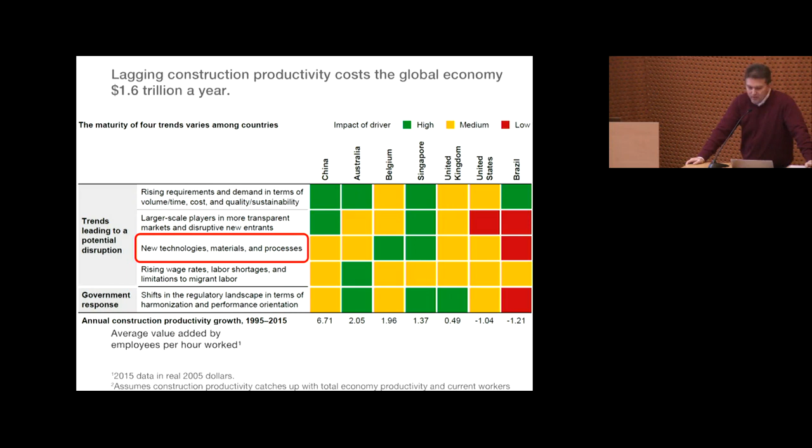Of the four key trends that can disrupt this phenomenon, only one is technical: new technologies, digital technologies, new materials, and advanced automation. The problem is how can we exploit these digital and automation technologies without first digitizing our processes and hence our products?

If you look at how we are doing in terms of digitization within the construction sector, we are almost the worst. Only agriculture and hunting is below us. And this is before we actually are at the very bottom of all industries in terms of data stored.

We basically lack the efficient means to cost-effectively generate and exploit what we call digital twins of our assets, which is why only less than 2% of the existing building stock even has a basic design information model of any sort, and even less for horizontal infrastructure. This is the problem that my group at Cambridge is focusing on.

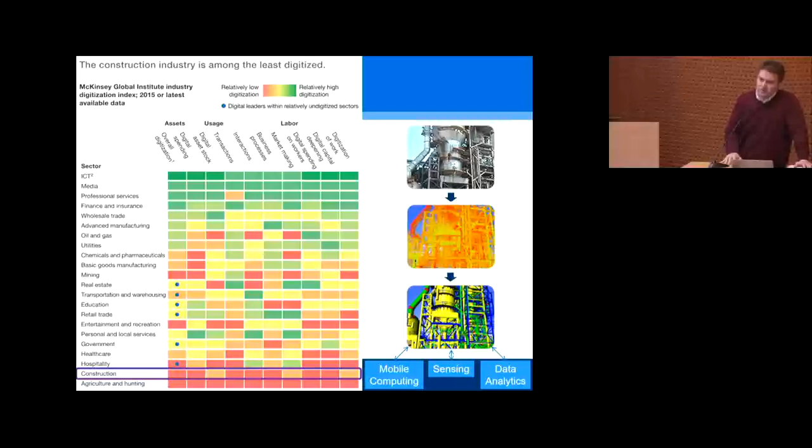But before I tell you how we solve it, I want to tell you first what the outcome looks like. Define the digital twin. For manufacturing, this is not a new expression, it's been around for a while. For civil engineering, it is a rather new expression.

Yes, it is a model, a digital copy of a real thing. But what makes it different than all the other models is two aspects. One is replication: it has to accurately replicate the real world, both in terms of geometry and other aspects. The second is connectivity: it has to be connected ideally to the real asset so that we can see, hear, and feel exactly what the asset is experiencing.

So, in a nutshell, what we try to do is create geometric digital twins of buildings and infrastructure, enrich them with structured and unstructured data, and then exploit them to improve design, construction, and operation processes.

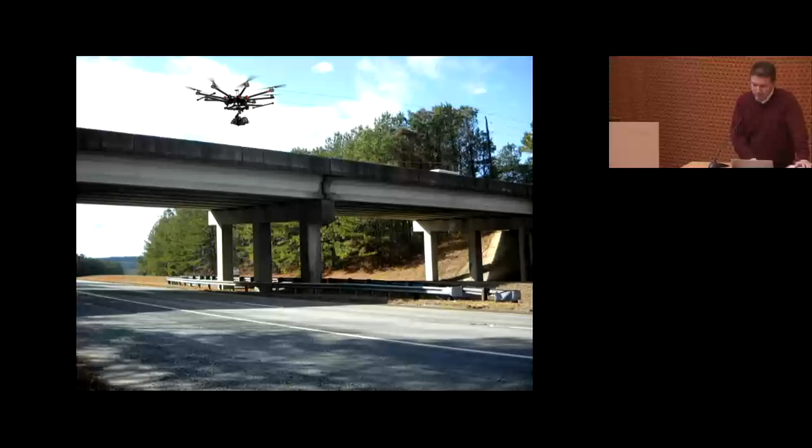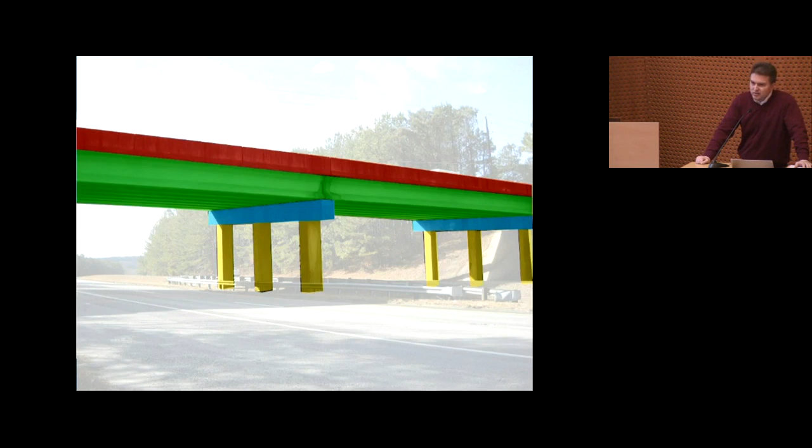So the example you see here, I want to automatically somehow scan this bridge in some way, get the points and the pixels. From these, convert them into actual objects of an information model, and then add the real textures on top, detect and measure, for example, any visible condition data, and assign these things as properties to the object, ideally with little or no human input.

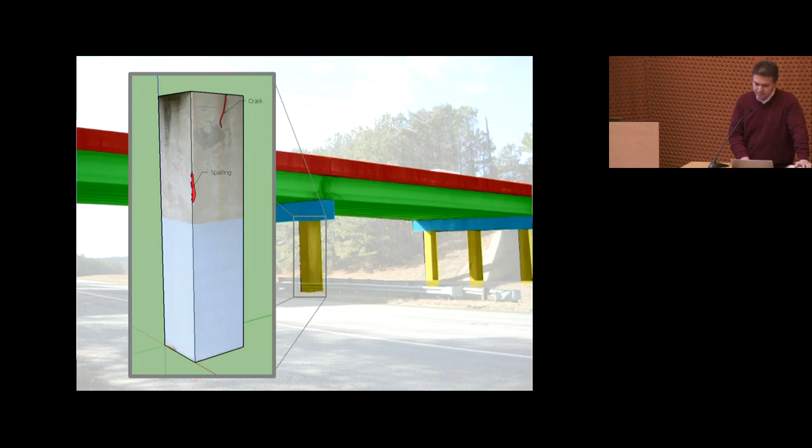And of course, I then want to exploit this outcome. So here's how we do that. I'll start first with some work we've done quite a lot of years back.

This is work we finished in 2012 on what we call mid-range mobile videogrammetry. Back then we were trying to scan buildings with laser scanners, and it would take us quite a lot of time to finish scanning sessions, given the time it takes to produce each scan and the fact that you have to scan separately in every single room if you want to produce a complete model.

At the same time, I was exposed to several medical tools that allow you to scan a human body interactively, which was pretty cool. The problem is that we couldn't use those tools for civil infrastructure because we had long scanning distances. I had to be able to do that scan from, let's say, 25 meters away.

So what we did at the time is we came up with a modification to the hybrid bundle adjustment, to the bundle adjustment process used in photogrammetry, to add on top of it not just point features optimization, but also lines and plane features, which are actually very, very strong in infrastructure.

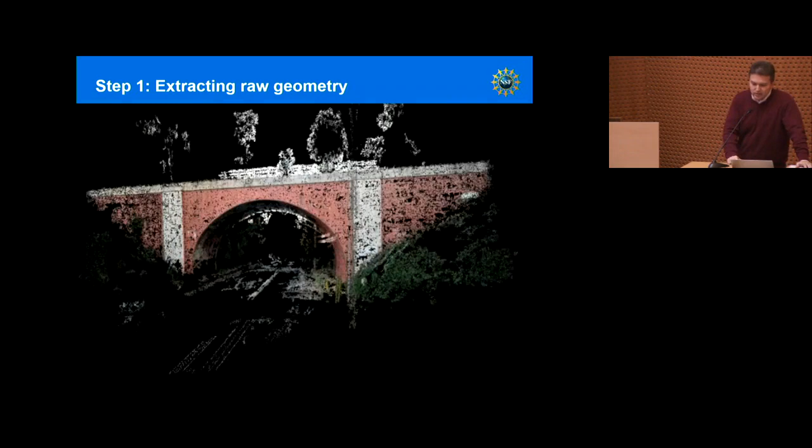The consequence of that is we were able to come up with a solution that allows you to take your phone out, videotape a building from 25 meters away, and from that create a point cloud with a sub-centimeter spatial error. Now that's all great, and then you can use additional techniques to fill the gaps, equalize the densities, fix the holes, and so on.

But for us, that's still just a point cloud. It's the beginning of a journey rather than the end. Engineers, at least our kinds of engineers, don't like to play with points. They like to play with models.

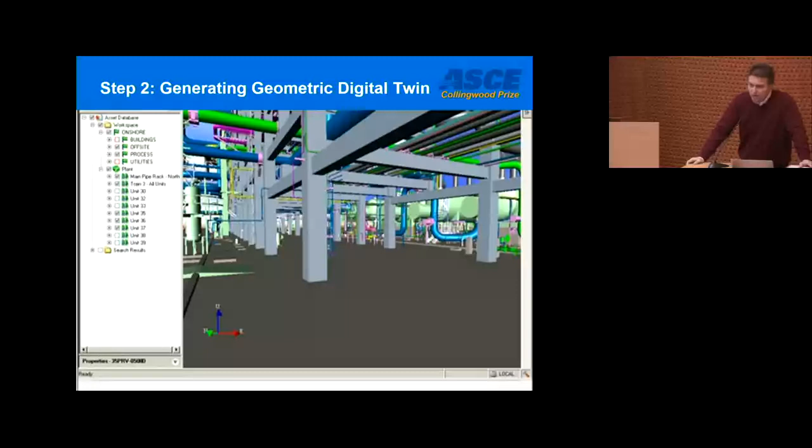And so our next challenge was, how do I go from a data set like a point cloud, which is primarily meant for the computer's eyes to see rather than a human's eyes, into something that engineers are more easily familiar with, like the models you see here. That's actually a much bigger challenge, and it's a much bigger challenge for a couple of reasons.

First of all, we're talking about a massive labor task to create the models. For example, for every 1 day of laser scanning, many sources report you need to spend 10 days modeling. The example you see here, a reactor building with 40 billion points, took 10 people 6 months to make the model. This is from EDF's research.

The other problem is that we're looking at massive point clouds that we cannot open with a single computer in many cases, with well above 30 billion points. In large industrial facilities, we easily exceed 100 billion points. We can only open them piecewise, try to model, and then try to stitch the results together at this point.

But the worst problem of all is what I call modeler fatigue. It's a boring job. Can you imagine someone modeling pipe after pipe, valve after valve? We're talking about tens of thousands of objects, in some cases hundreds of thousands. This is clearly a type of problem that screams for automation.

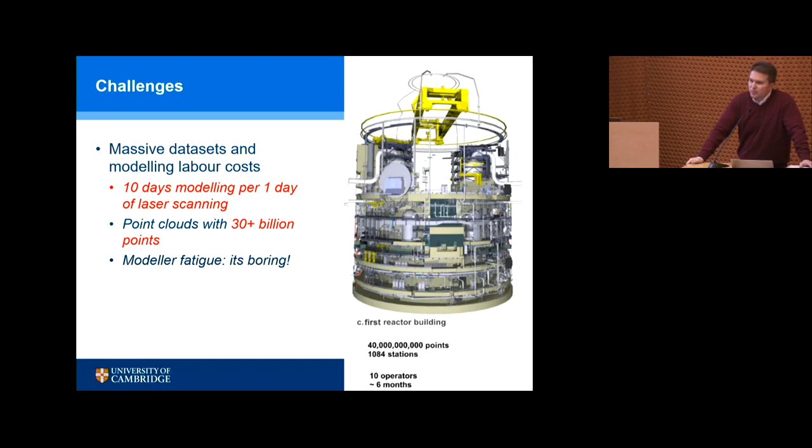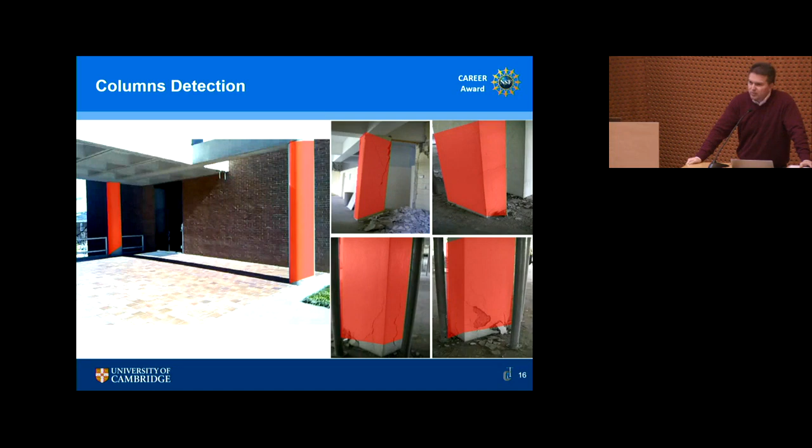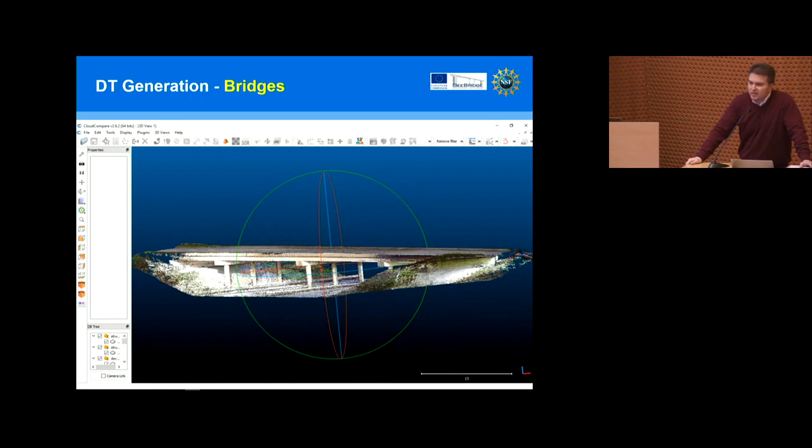Zoom in 10 years later, now we have the ability, for example in the case of bridges, to scan a bridge and then from that scan automatically create the components, and then use them for various purposes. What I think is very important to mention is that we can do this with real data, not synthesized, idealized data.

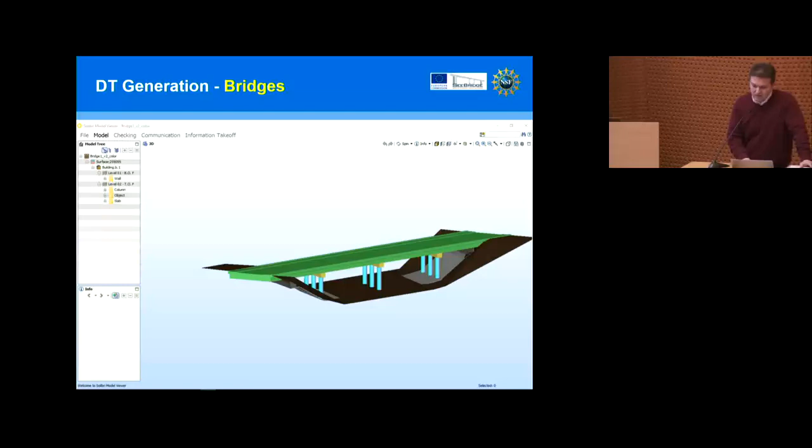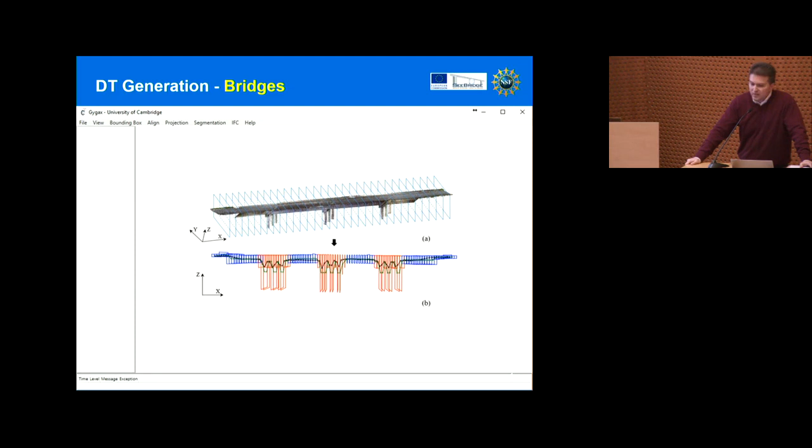No bridge is straight. No bridge component is straight. In the real world, we have to deal with all sorts of peculiarities and skews. Our ability in this case to use recursive slicing techniques and others allows us to cover these complexities and produce reliable models at the end of the process.

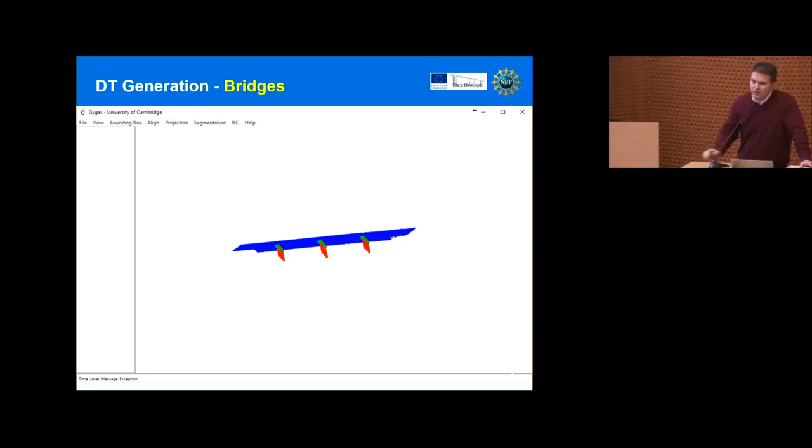In a nutshell, we can go from this to the point clusters to the model without a human interfering in the process.

Same thing for buildings. There was another project we did several years back, funded by the European Commission together with Stanford, Georgia Tech, and other universities, to do what we call formalizing the digital twin generation process, or in more colloquial terms, how do I go from a video file to an information model.

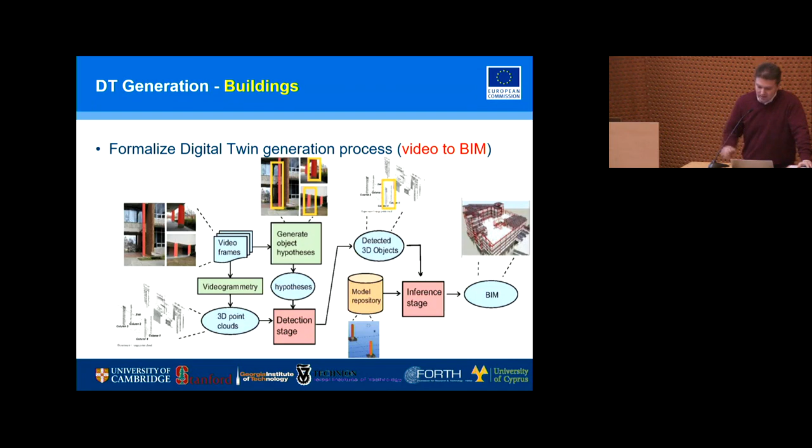In this case, we looked at similar techniques as we had used for bridges, basically a top-down hierarchical segmentation process. Only here it was a bit more difficult because in bridges everything is exposed, whereas in buildings we try to hide everything.

In many cases we only see part of the object, and it's very difficult to understand what it is just from what we're looking at. So in those cases we have to infer what might be in the back.

Just to explain with a bit more detail what kind of strategies we're looking at: in the case of a building, I'm trying to use architectural priors, knowing how a building typically looks, to try to hierarchically segment it. For example, I know a building has floors, so my first job is to segment the floors.

Once I have the floors, then I know that every floor is composed of rooms. And what is a room in a point cloud? It's a big empty blob, right? I want to find those big empty blobs and understand the spatial topology and where the rooms are.

Once I know I'm in a room, I can safely assume that most likely there is a ceiling above me, most likely there is a floor below me, most likely there are walls around me, and so on. I think you get the point. It's a hierarchical process that uses these types of architectural priors to help you understand your environment.

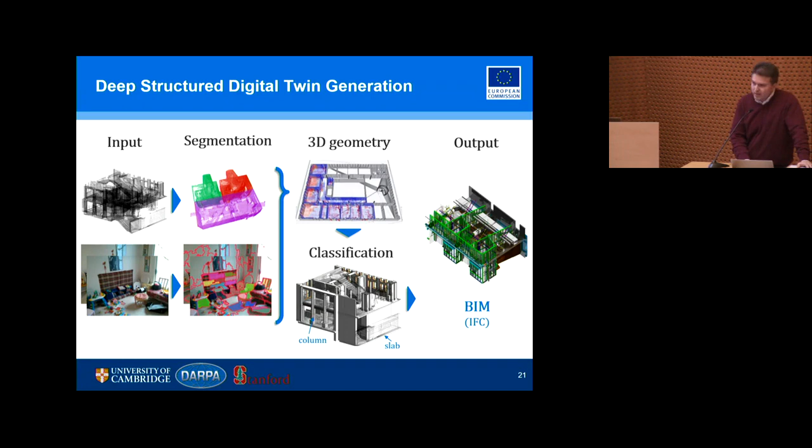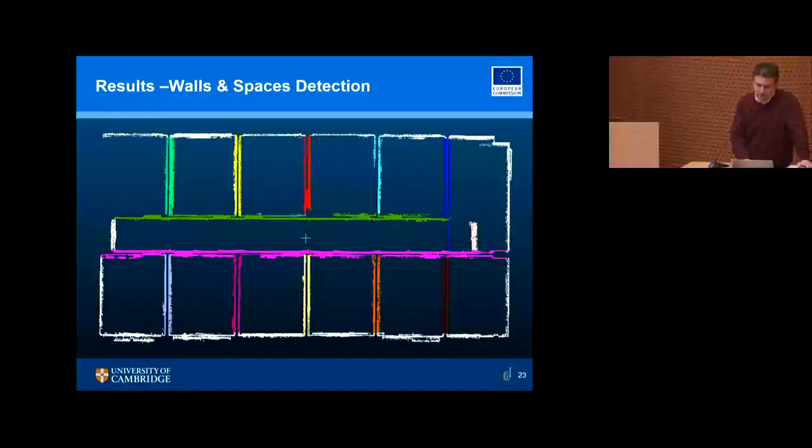This is exactly what you see here: how we use various deep learning tools to go from the big point cloud down to rooms, then from rooms to detecting slabs, even in the presence of clutter, then going from that into detecting walls, fitting components there, and then once I have the model, actually detecting the spaces.

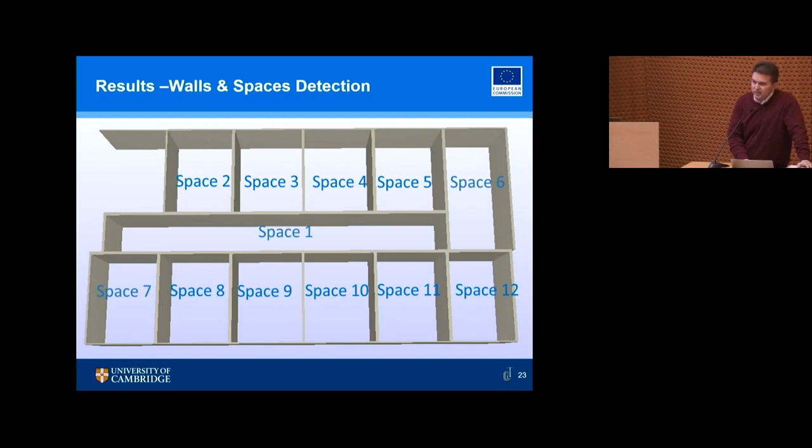But of course, geometry isn't everything in our case. We need to go beyond that. That's the case of enriching that basic geometric digital twin. In our case, we tried to do two kinds of enrichment: one was with condition data, the other one was with sensor data.

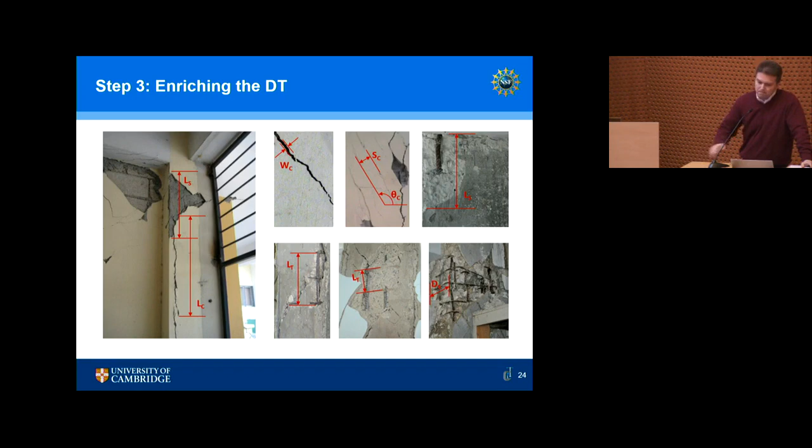In the case of condition data, we looked at adding textures on top of the components. For example, in the case of bridges, measuring on those textures the visible defects, and then assigning those measurements as properties to the model for the types of defects you see in the slide.

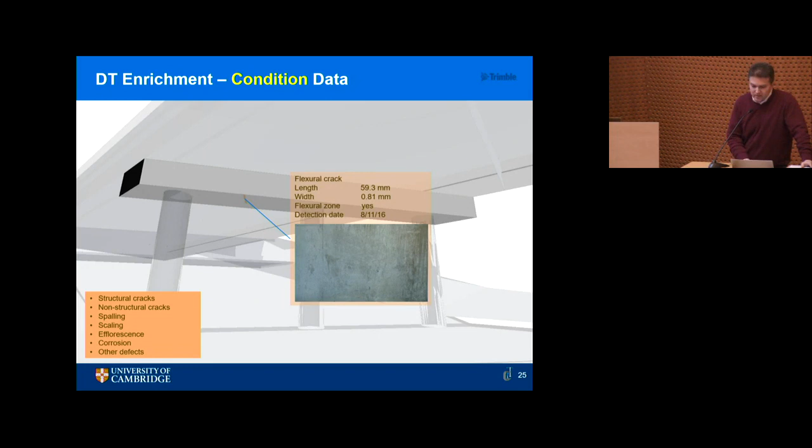We tried to do the same, by the way, for the case of roads. This is another project we finished a couple years back. The difference here is that we simply use your parking camera. As you're driving forward, we're capturing the cracks, the patches, the potholes, the various types of defects, classify them separately, measure them, and then send those measurements back to a local council to help maintain the roads as an outcome of this process.

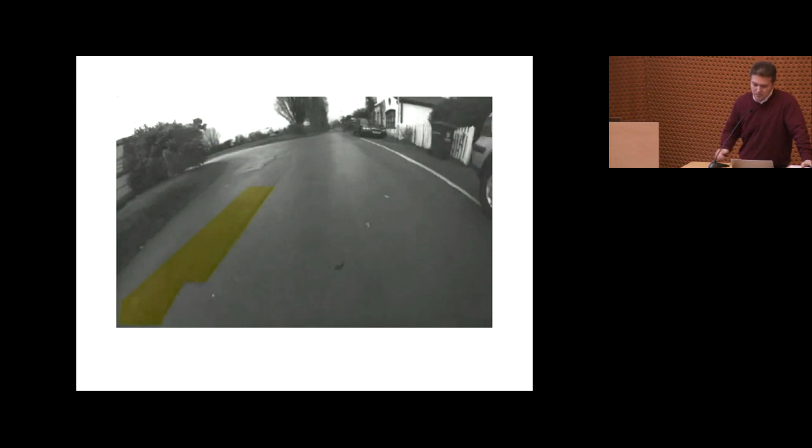And you can see here the process behind that. If you want, we can talk about that in more detail later.

Another example was with sensor data, as I mentioned before. A digital twin is not complete without connecting it to the physical twin. But to do that, I have to be able to bring sensor data into the model, and I have to be able to model the sensors themselves. So we created what we call an IFC data model extension that allows you to place those sensors on the components. The second thing is to bring the time series data that come in from the sensors and visualize them on the actual geometry.

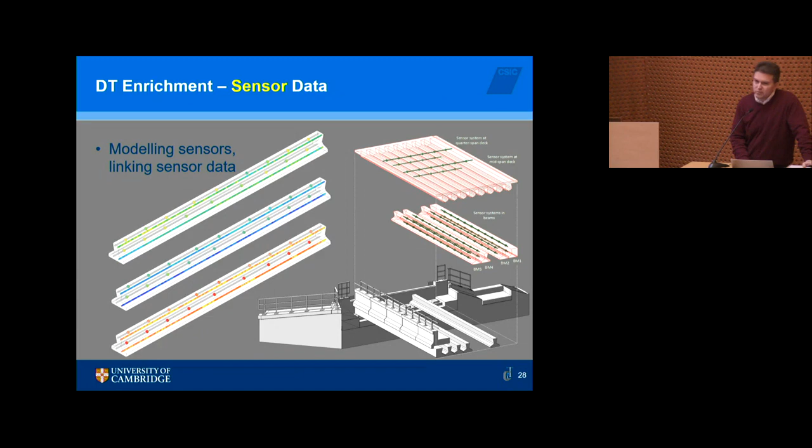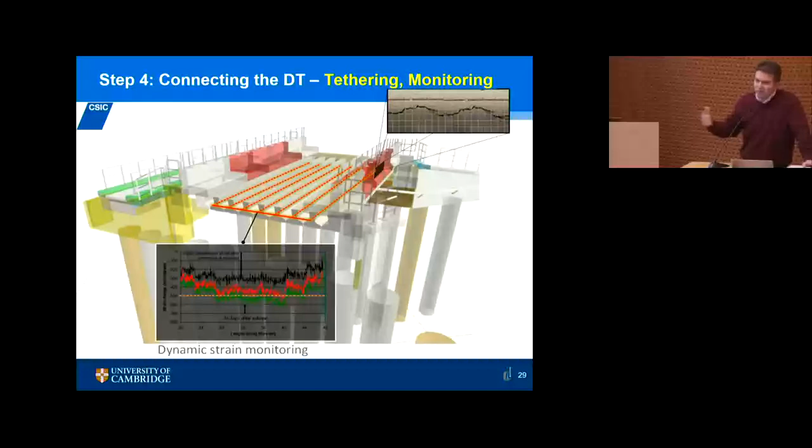What this allows us to do is what I call the live digital twin - the connected model, where now I can tether it to the physical structure, and as a consequence, I can actually monitor the stresses and all the kinds of problems that it feels during its lifetime.

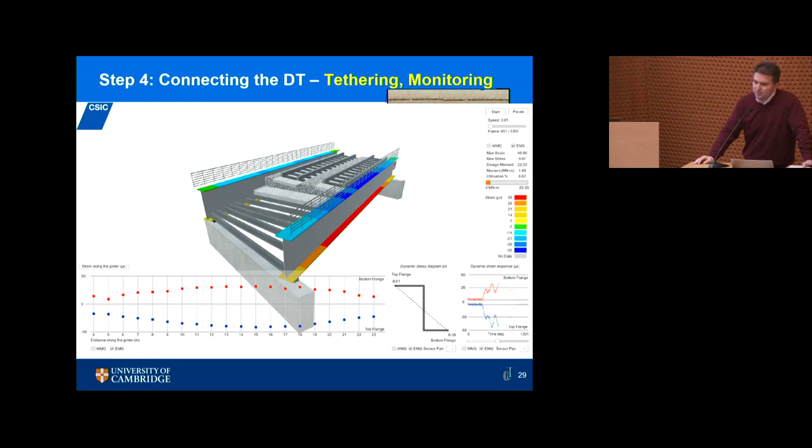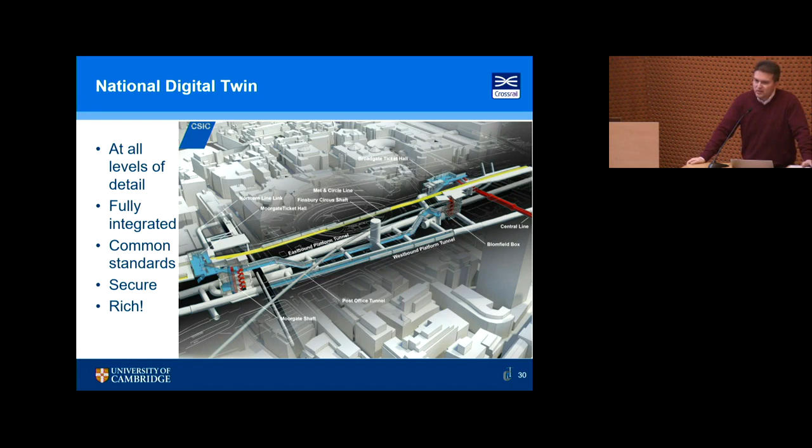The long-term goal is what we call in the UK the national digital twin. I want to be able to get to the point where every single asset of the country is digitized, where I have access to various levels of detail for various types of applications, and I'm able to cross-correlate data across the different boundaries and use that to predict what might be happening next.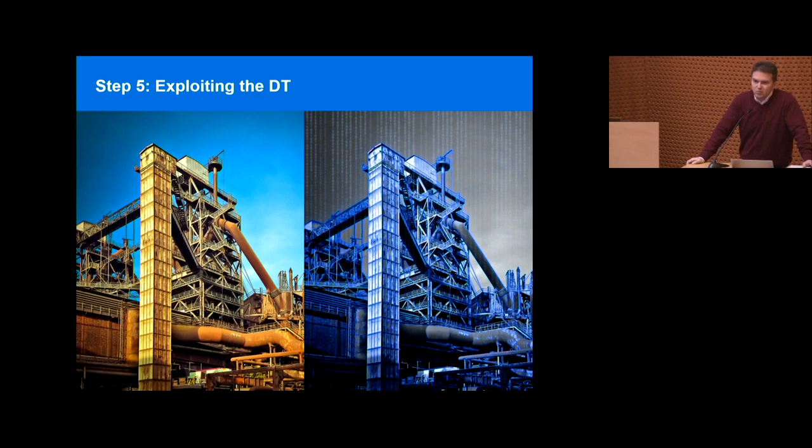The last part I want to talk about is how we exploit these models. What can we do with them? We put in so much effort to create them - where is the value? So I'll present here a few examples.

This is more applied work. One had to do with the design phase. This is a project we did with Laing O'Rourke, a contractor in the UK, as well as Tony Gee, a bridge designer. This was in relevance to a major project in the UK called High Speed 2.

This is a project that connects London with Birmingham, and it has roughly about 300 bridges and about 100 tunnels. Can anyone guess here what these 300 bridges have in common?

So what they have in common is that none of them are iconic. None of them are anything special - typical highway overpasses that you want to build on time, on budget, with maximum certainty and minimum disruption, which makes the concept of design for manufacturing and assembly very attractive.

But for us to employ that in civil engineering is very difficult. We're used to designing and delivering bespoke bridges rather than standardized components that can be produced in a factory and delivered on site. So what we did to help bring this concept, which we call DFMA, into the design phase...

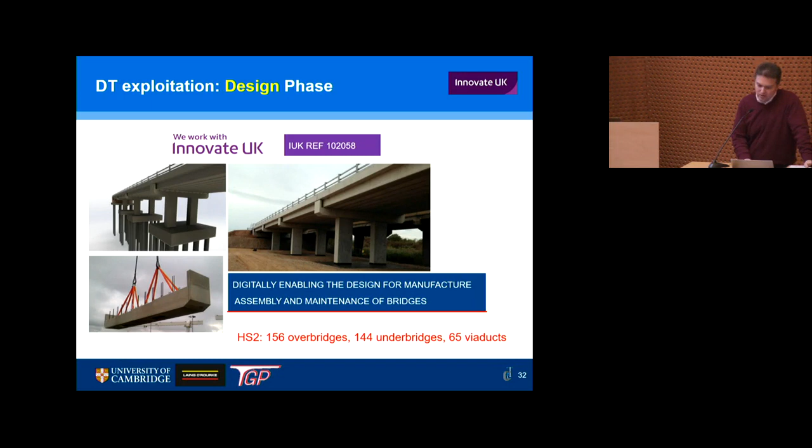...is we mapped the entire decision-making process from route alignment all the way to delivered bridge. We mapped every piece of data you need to make each decision, and then we linked those decisions together and started reorienting them so that every time you make a decision, you have exactly the information you need to do that reliably. The second bit this allowed us to do is understand the dependent and independent variables of this process.

For example, in a typical highway overpass, the number of independent variables was something like 16 - a very small number of things you can actually affect. But by knowing that, we were able to create this solution here.

That saves them about 7 weeks of work for every iteration - they can finish 7 weeks in 2 minutes. So they can actually sit with the client and repeat that process as many times as they want to see what would happen if they change this variable and that variable within the various scenarios.

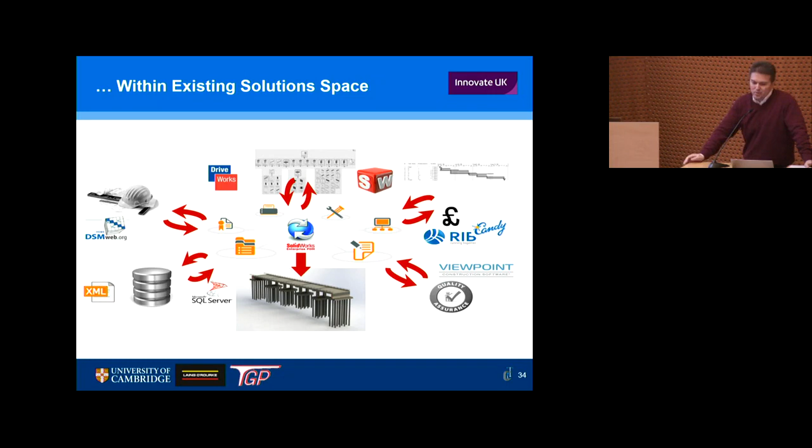Another application, moving on to the construction phase, was taking the digital twins into mixed reality and using them for exploring construction progress in this case. The model that you see is a schedule-loaded model.

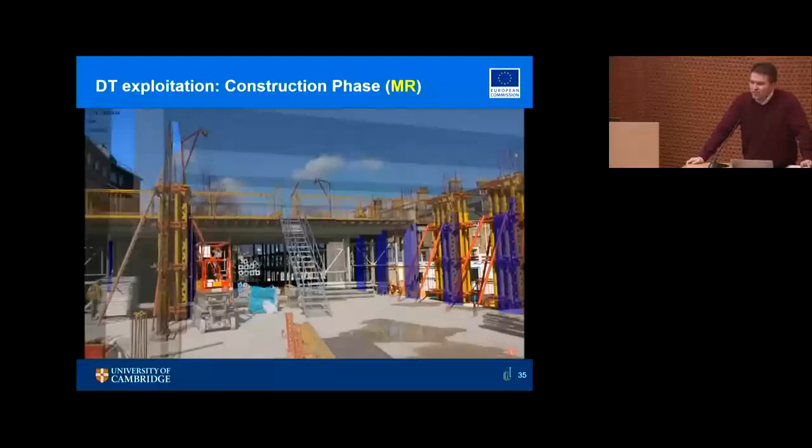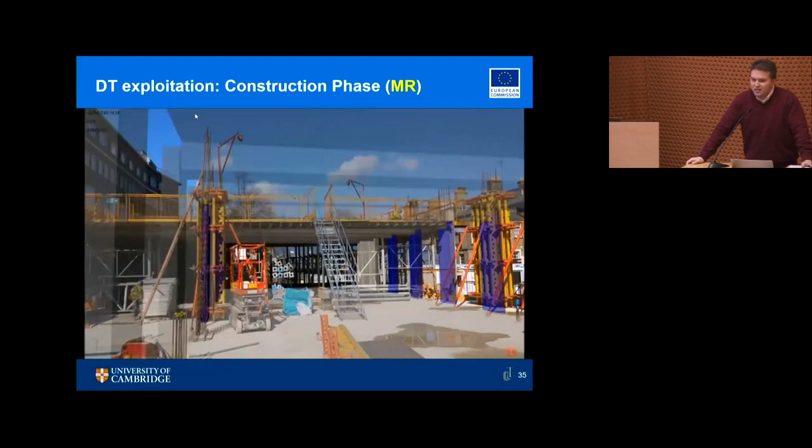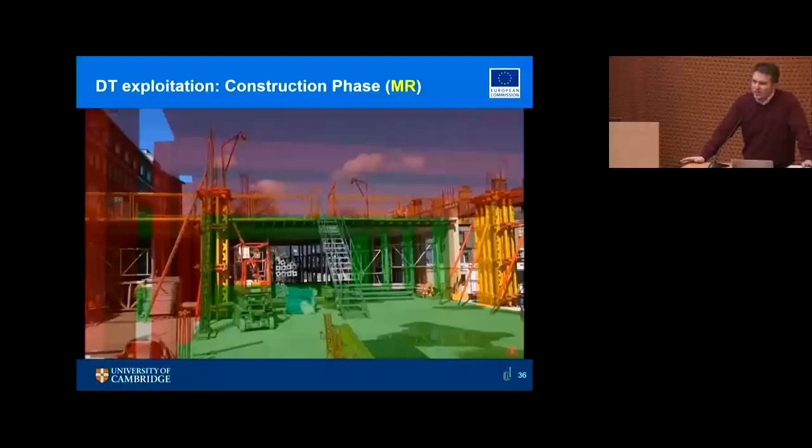The components you see were all supposed to have been built at the time of this video. Now you can see this project is behind schedule because a lot of components are missing. Once you can detect that, you can do a simple volumetric comparison and immediately update your progress data, telling the inspector that everything in green is completed, and everything in red is something you should have done already but haven't. Very simple application.

Another example has to do with monitoring in a factory. What you see here is a vision tracker we created that considers elements about the worker's process to make the vision tracking a lot more reliable. Even when we see just a little bit of that person, we can still track him, and if he disappears and returns, we can recapture him and assign the same ID, for the purpose of creating the spaghetti diagram of motions you see on the right, then using that in relevance to the component he's actually making in the digital twin to measure productivity.

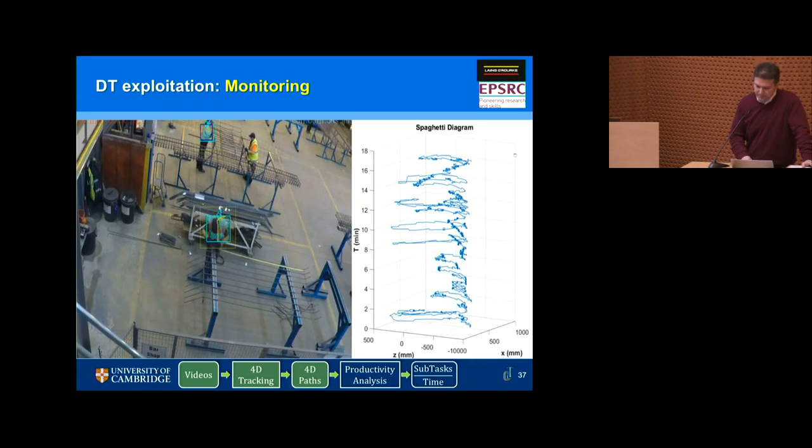It also allows us to understand the process itself. If I see a lot of repetitions in the moves and stops that are regular, I expect good progress. Whereas if I see an irregular pattern, I can assume something is inefficient. Or if I see nothing happening at all, then probably something has happened and production has stopped.

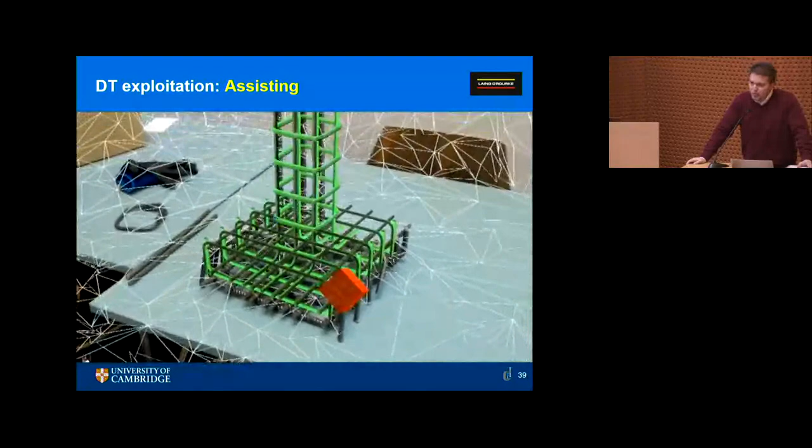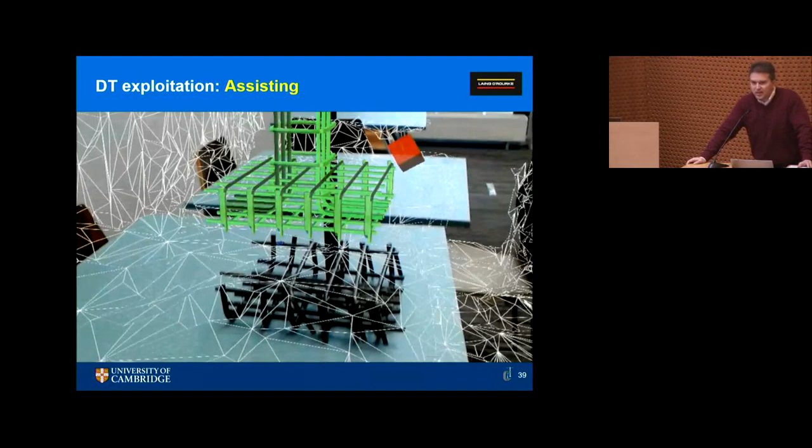Moving a step further, instead of just monitoring, we can also assist the person doing that same task, again using mixed reality, by bringing the actual model in front of his work environment and allowing him to build directly using the model. To explain what a massive difference this can make for the worker, in a previous project we measured that in steel fixing, workers spend about 60% of their time reading drawings and measuring. I don't need to do either of these things in this case, so I can easily make a person twice as productive simply by allowing him to build this way.

Of course, you can always go further. This is what I call assisting plus plus, the concept of robotic teleoperation. This is work together with a colleague at Cambridge in evolutionary robotics, Fumiya Iida.

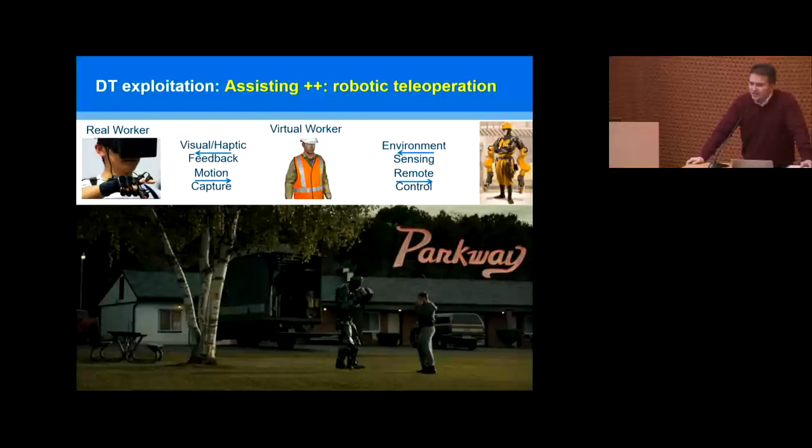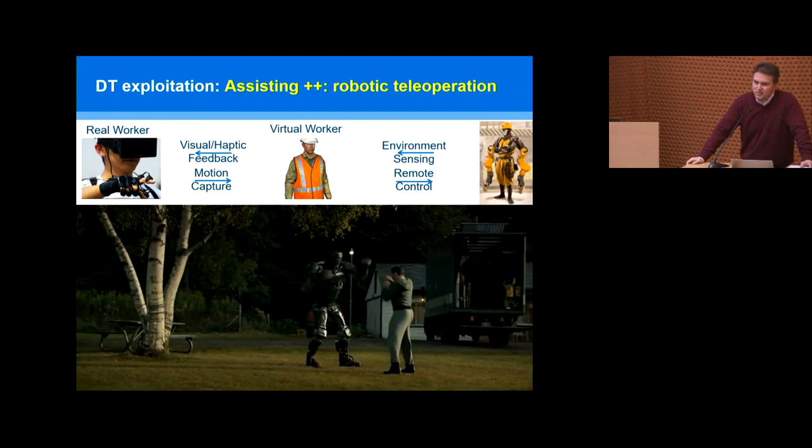I'm assuming some of you may have seen that movie playing in the bottom, Real Steel with Hugh Jackman. If you haven't, it's a really good movie. What you see here is basically someone pretending to be boxing, but he's not actually doing the boxing, it's the robot doing it for him. This is a clear, simple case of robotic teleoperation, where you monitor a person's motions, transfer that to a robot, and then bring back what the robot sees and feels to allow that person to better remotely control it.

When I watched that movie, I started thinking, why can't we do this with construction? Instead of a boxer, why not have a worker monitored in the office, and then have those motions transferred to the dangerous construction site so the robot can do the work, with a lot more safety for him.

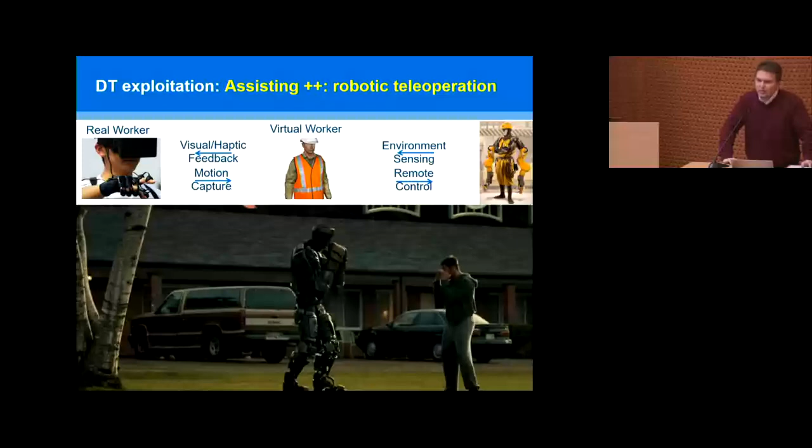A very early prototype of that is what you see here. Very simple case: we have a student in the back capturing all their motions down to the fingers, and through that we allow him to control this brick building process, picking up bricks, picking up a spade, placing mortar, picking up a hammer, aligning the bricks, and so on, without him physically touching any of these tools.

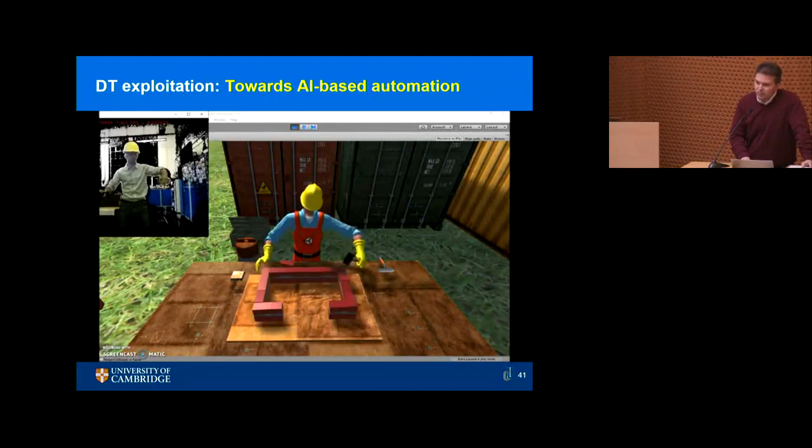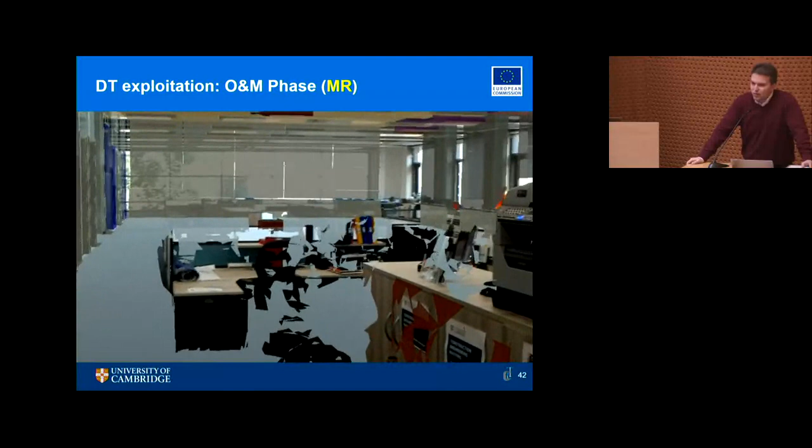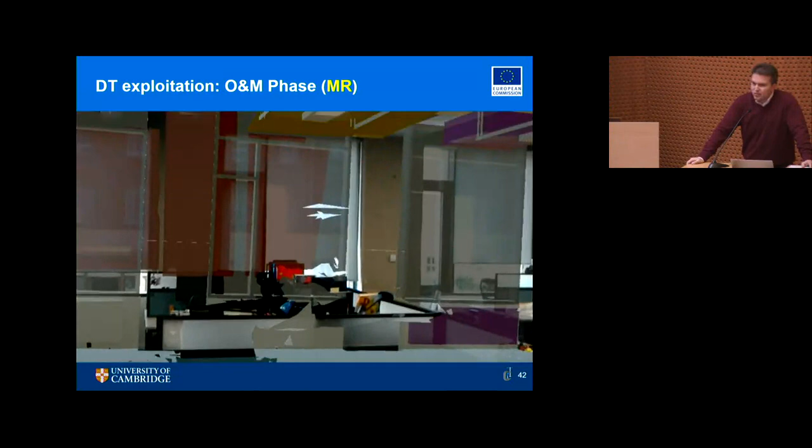Another example, taking things further into the operation and maintenance phase, I'll return to mixed reality, another project on bringing digital twins on top of the real world. What you see here is a development we did on top of Microsoft HoloLens, where we detect the floors, ceilings, and walls, using those detections to further refine the registration capabilities of HoloLens so you get a much smoother motion as you walk across the room.

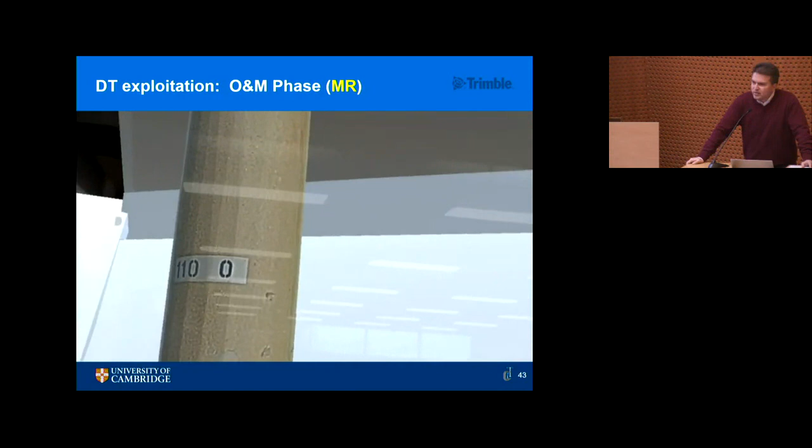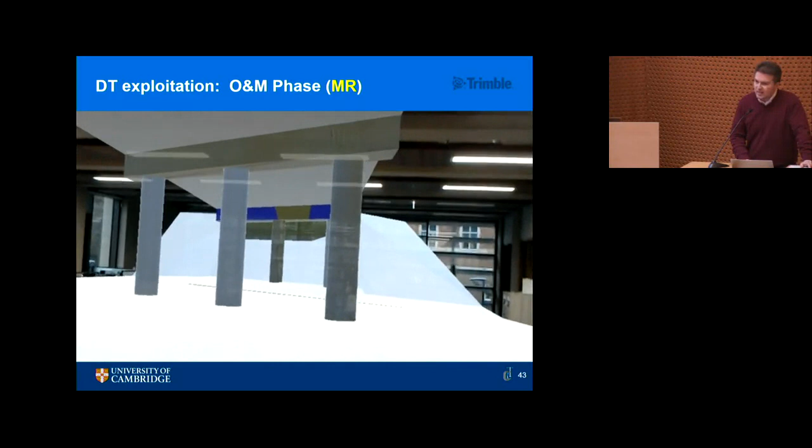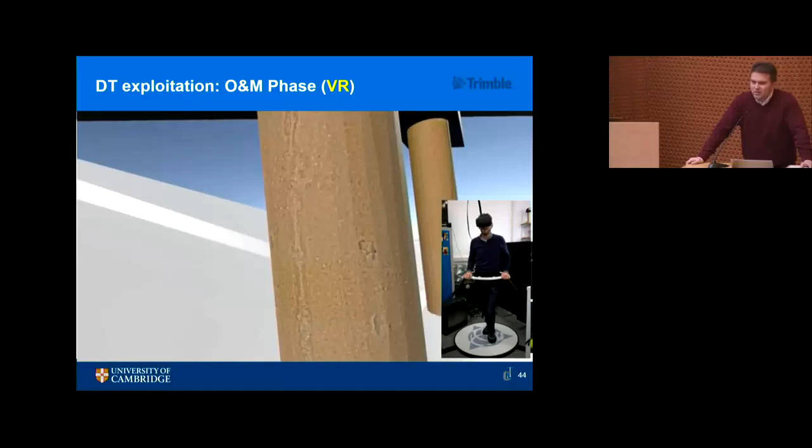Another example, for the case of bridges: these are actual digital twins of bridges with real textures and real problems. Once we have this data set, we can bring it to the office and allow an inspector to walk around and visualize the problems, doing a bridge inspection right there. Or you can bring the same data set into a VR environment and allow that person to do exactly what he would have done on site, only this time within the office, in a much more comfortable environment, which is also great for training younger inspectors.

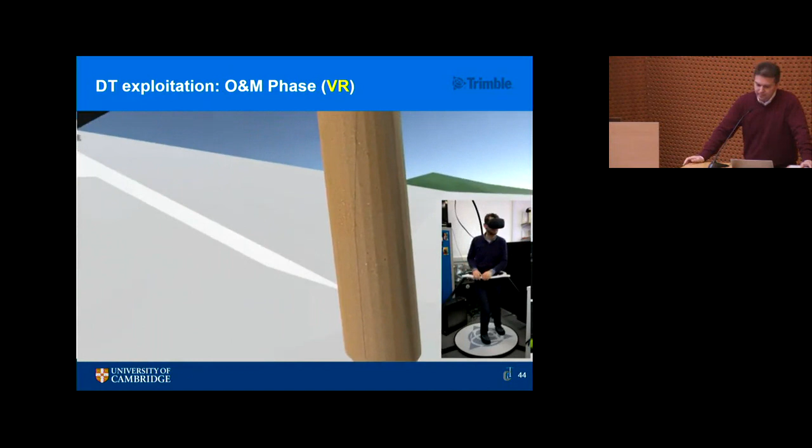The last example I'll mention is related to asset protection. It's an example that's very simple but very powerful.

In the UK alone, a truck hits a bridge, I believe, every 4 hours.

That's because, at least in Europe, but also quite a lot in the US as well, we have a lot of old assets, old bridges built in the 40s, 50s, and 60s, back when trucks used to be a lot lower. Now the trucks are higher, but the bridges haven't grown.

And so the consequence is we have a lot of low height assets, and a lot of the truckers are not aware of this information, hence the concept of bridge strikes. If you Google bridge strikes online, you can find tons of examples of very, very dangerous accidents that have happened as a consequence of this.

There are solutions to this, active solutions with permanent infrastructure and laser beams. However, those solutions are so expensive that the feedback we get from owners is, I'm not paying for that, I'd rather let the drivers keep hitting.

So what we try to do is come up with a solution that's orders of magnitude cheaper so that it would be worth it for them to install it in more bridges. And this is what you see here.

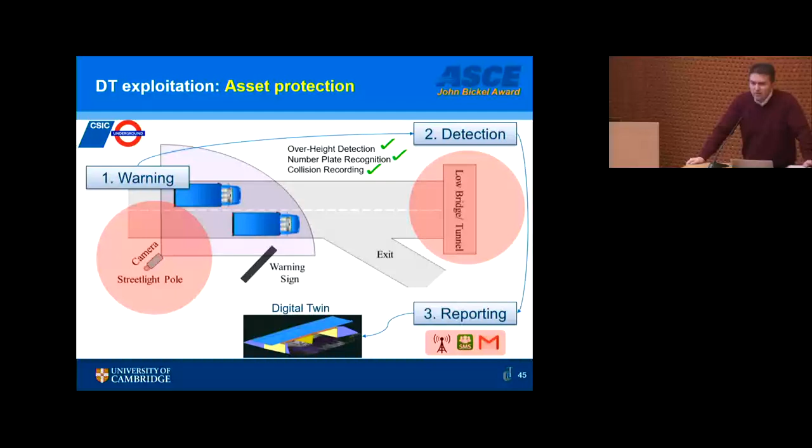You can see here the concept, very simple concept of mounting the camera at the over-height plane and then using features in the video to detect any object that is passing higher.

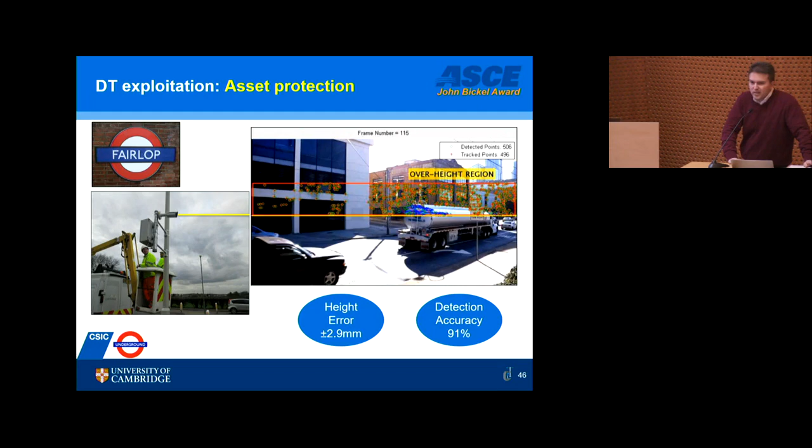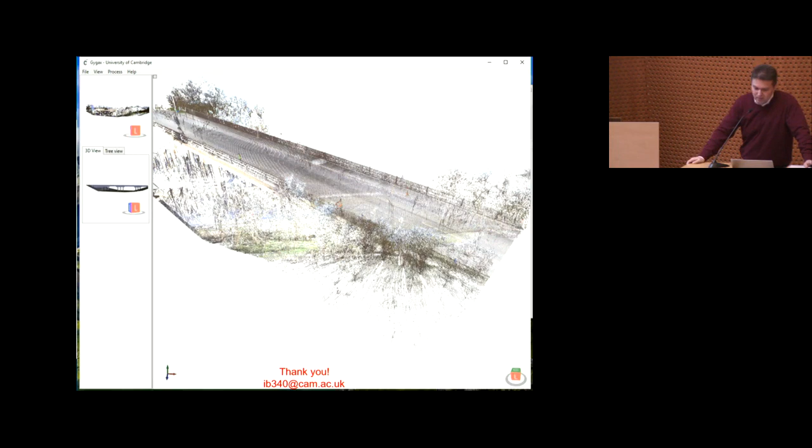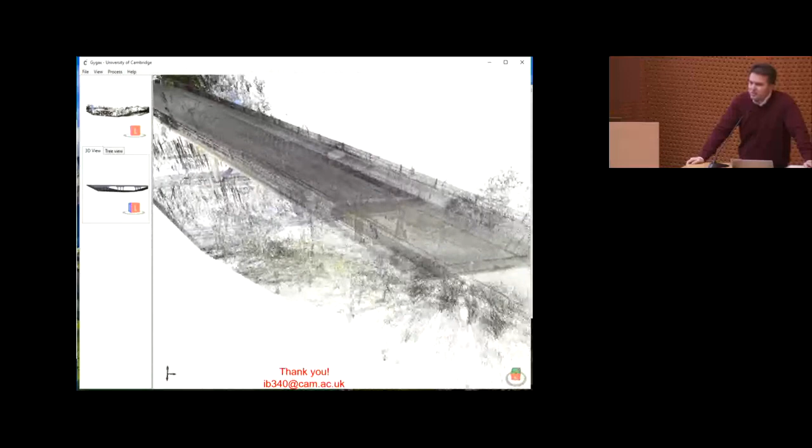This, by the way, is our in-house software that we use for a lot of our work, called Gygax. I call it MATLAB on steroids, because what it does is allow you to visualize as well as manipulate point clouds, building information models, images, videos, all in the same space, while at the same time it is linked directly and natively to OpenCV, PCL, and various other libraries that allow you to use their power to do quite a lot of interesting stuff.

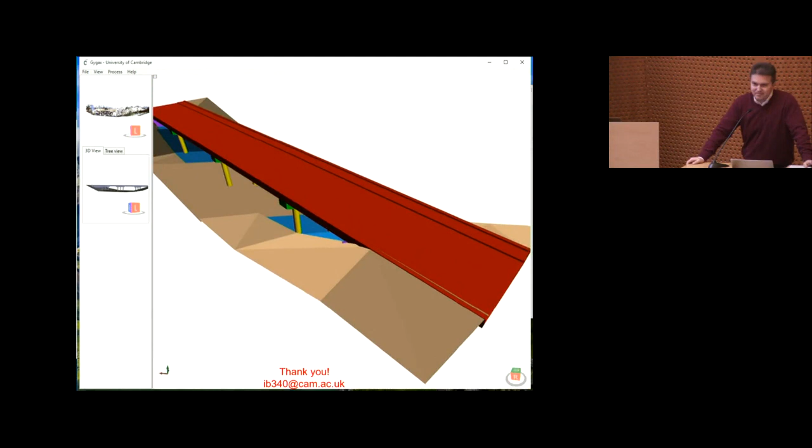That's it. I try to keep it simple, no equations, no nothing. Go ahead.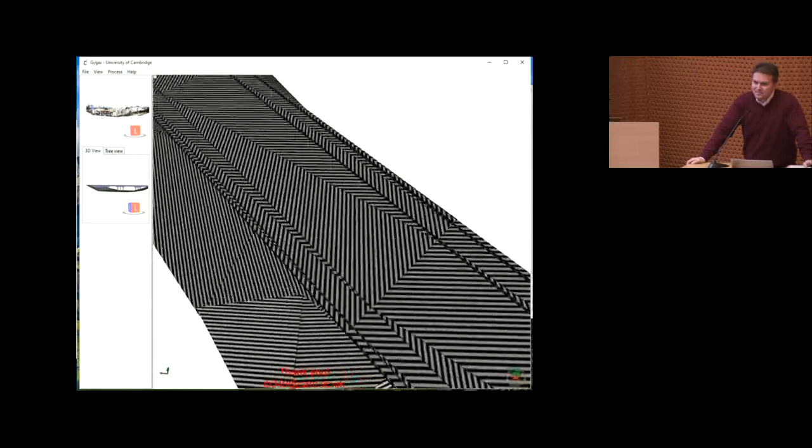So you mentioned drawing information from sensors to detect the conditions of these things. Is it also possible to infer the physics or the structural behavior of bridges, buildings, etc. from scans? Or would you have to know how it was constructed to be able to infer that?

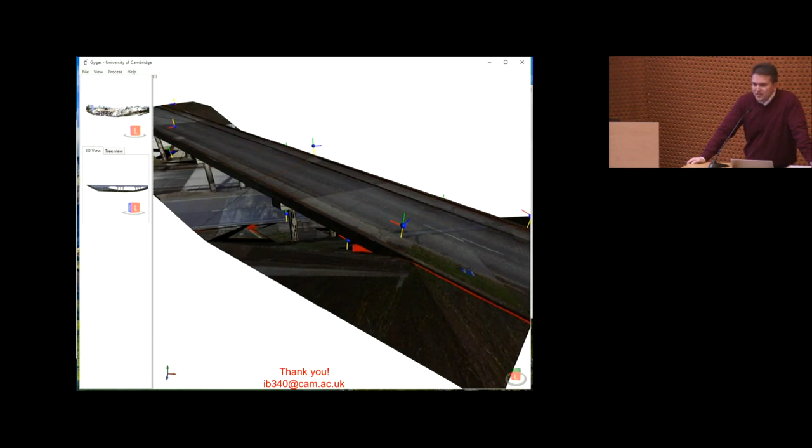So this has to do with going further down the level of detail path. Basically, what you can get from points and pixels is only what's on the surface, what's visible. If you want to go deeper and understand what's happening inside the components, you can, of course, infer it. But if you really want to know, then you have to use other kinds of scanning solutions like radar, sonar, and so on.

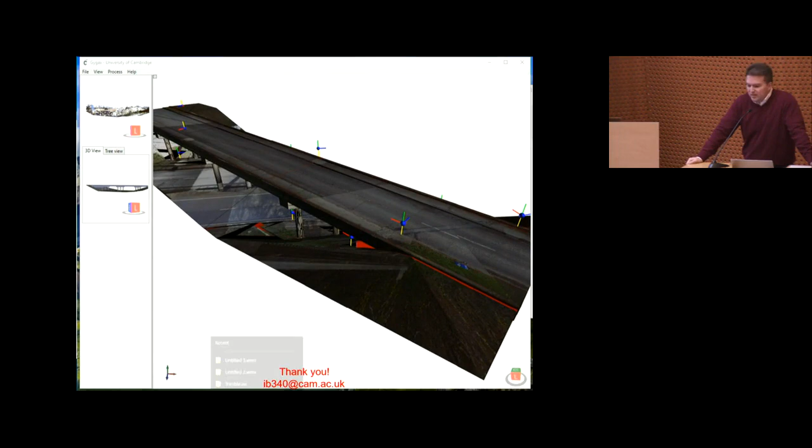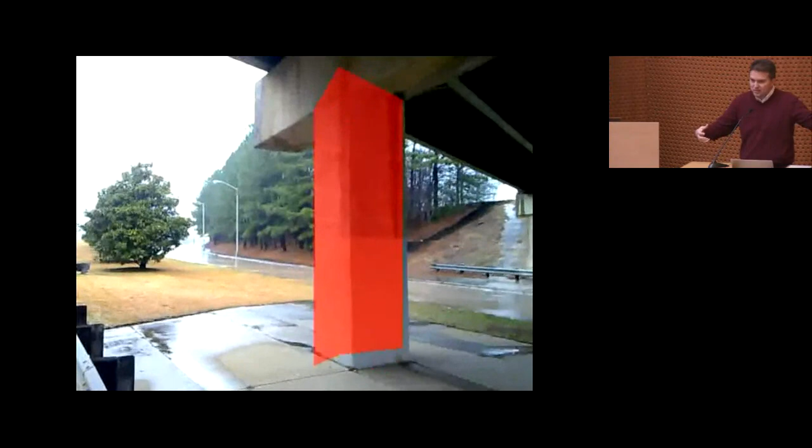There are a lot of discussions going on about how we can use the concept of 3D medical tomography, where you're scanning multiple sections of a person, and then bringing those sections together, knowing how a typical human body is constructed, to assume the in-between in the buildings and bridges environment.

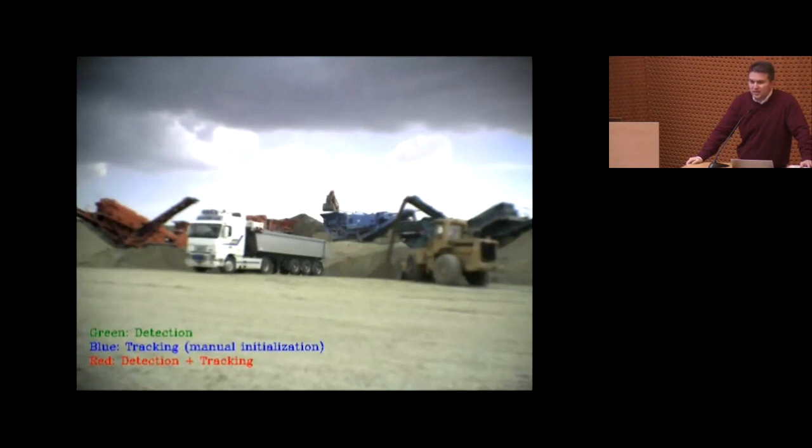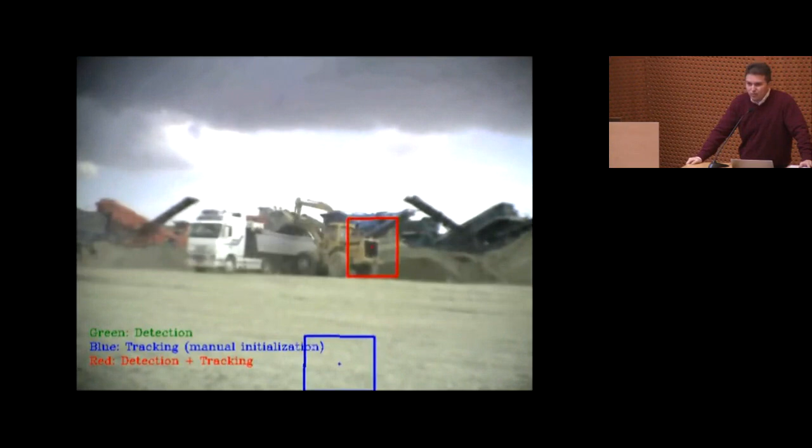But that yet is just a thought. It hasn't been practically applied, whereby we can go to a building and scan multiple sections and do that kind of work. Our thinking is that we're trying to get the lower level of detail first, the objects, the visible ones, and once that's in place, then the obvious next step is let's go further and detect what's inside.

So you're visiting a big group of geometry researchers in the computer science department. What problem do you need us to solve for you?

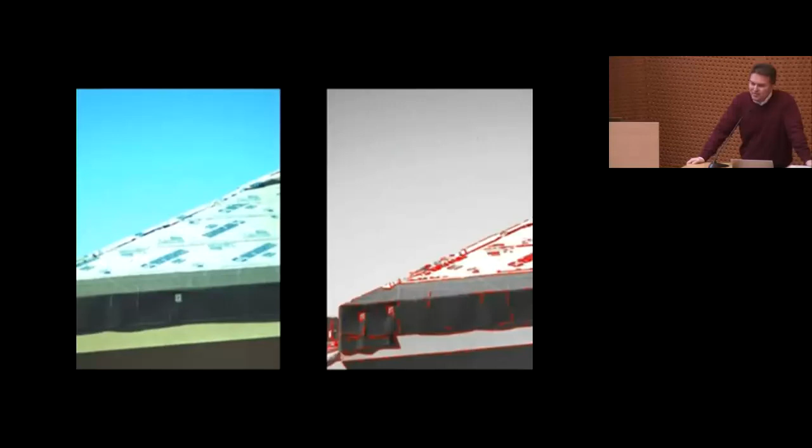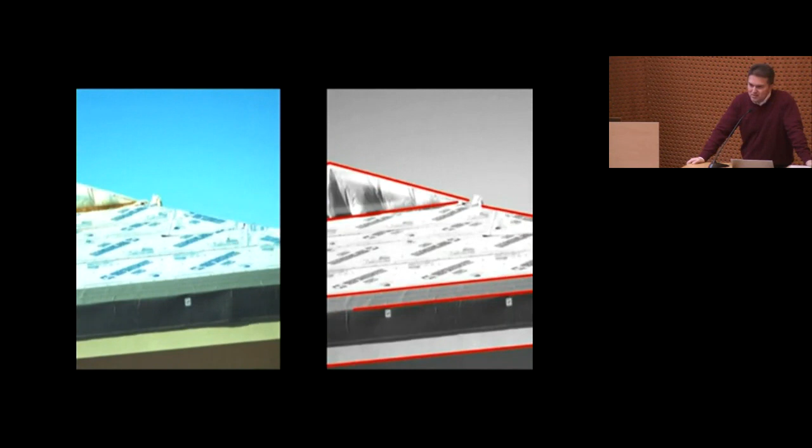All of these. A lot of the problems that we have are, as you can see, related to geometry. We have a lot of problems in terms of detecting objects. That's not a solved problem yet for many of the assets, okay? And creating those geometric digital twins. We have problems in terms of representation, compression. How do I best represent this information so that I maximize the information value while minimizing the redundancy of data?

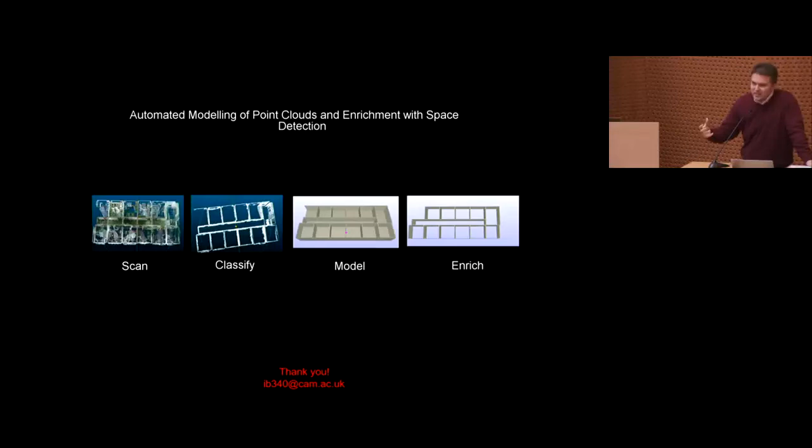There's also quite a lot of problems within that space relevant to how the geometry interacts with every other type of data. Because in essence, the geometry is kind of the linking core on top of which you bring in the sensor data, the crack data, all the other problems. And without the geometry, you cannot make sense of all the other stuff. You have to be able to provide that correlation and understand that if a crack is in that position with that orientation, it means something very different than if it was somewhere else.

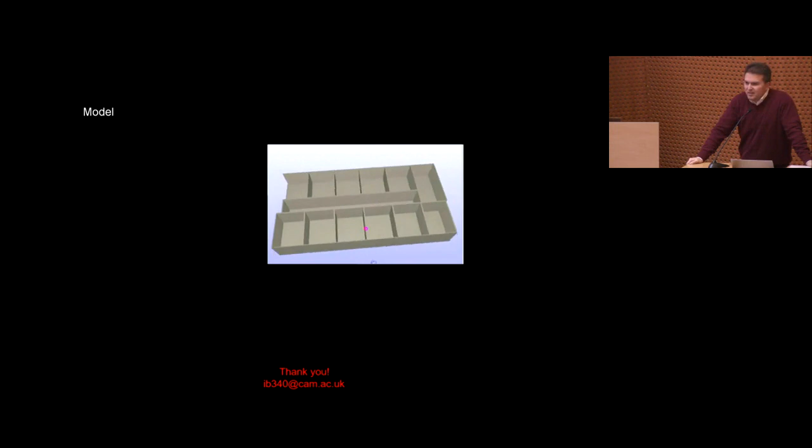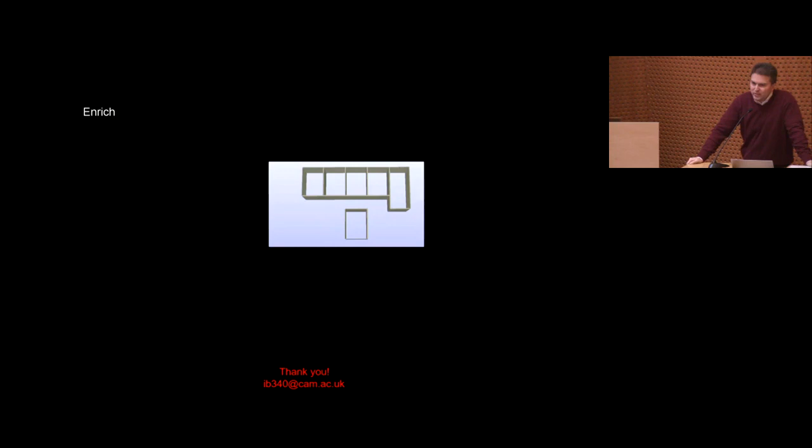There's also interesting problems that have to do with learning how we build things. Think about applying machine learning to the nature of architecture. Yes, buildings are different, but they're not that different. They have a certain degree of similarity that I think can be learned. And from that, we can use that learning to inform many other processes. Same thing for bridges, same thing for roads. You see quite a lot of repetition and similarity that, if learned, can be used for multiple applications.

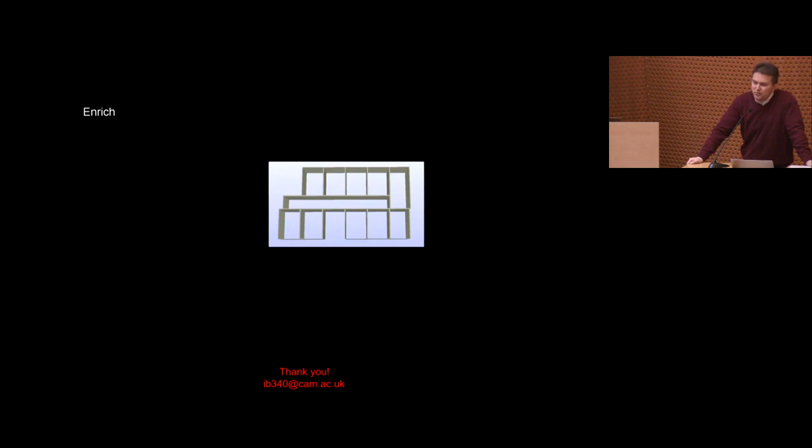So you mentioned learning. Do you need a particular type of learning for this domain? Where do you get your data? Unlike a lot of these problems in computer vision where it's enough to say car, human, sign, here you might need a very particular engineering widget that you have to buy from a specialized place. Where do you see the interaction between the fine-grained engineering problems you have and the learning aspect?

Clearly, there's interaction in the tool sets because, of course, we start with what's already there and see whether we can use more simplistic tool sets to solve more complex problems. In some cases, it works, and then that's great. In some cases, it doesn't, and then there is a challenge of how we can provide perhaps some additional intelligence on these tools to solve the problems.

To give you a simple example, it's the concept of the simple white wall. If I have a white wall and I give you the points and the pixels of that wall, what do you see? Well, it's just a white plane. You don't know if that white plane belongs to a ceiling. You don't know if it belongs to a wall. You need the context. A very simple example that shows the value of context, and the reason for having to learn how the environment works with itself so that we can better use it for learning examples.